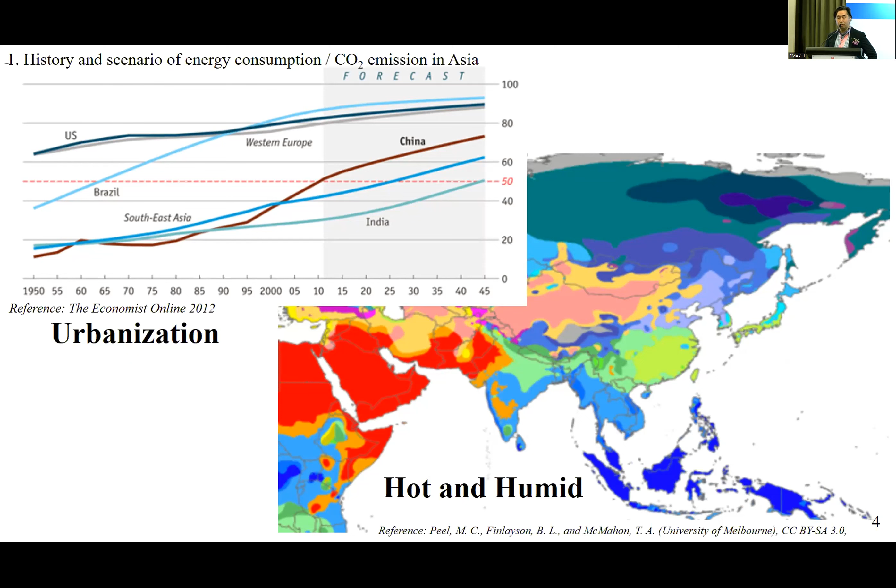Then from here, China and other developing countries are going to have more population in urban areas, becoming the same as us. It means people want to live in urban areas, right? This is one key point. And the next one is, you can see this climate zone graphic, and mostly the important cities - Tokyo, Singapore, Indian and Asian countries' fundamental cities - are located in the hot and humid area. So these are two keywords I wanted to emphasize today.

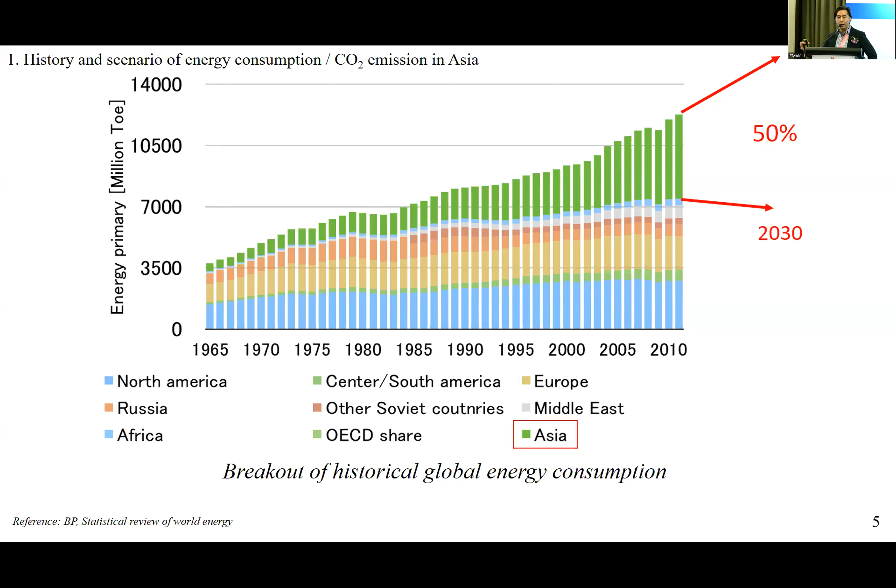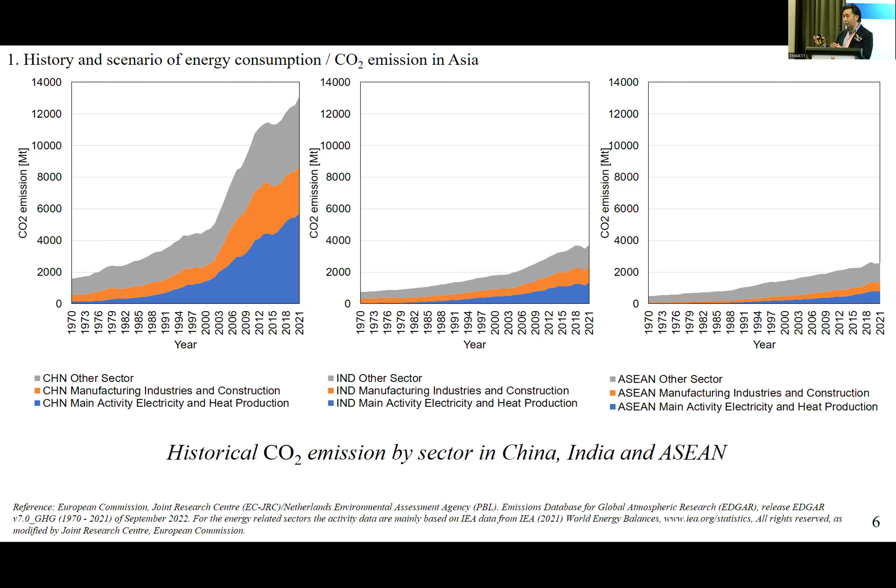Inside of Asia, of course, China is number one in emissions for CO2, followed by India and ASEAN. So the problem is people want to focus on the Chinese issue, but when it comes to some statistics in China, it's going to peak out as soon as possible, because the population is decreasing from now. And the Chinese target is by 2060 they are going to be carbon neutral. Maybe they will make a lot of effort.

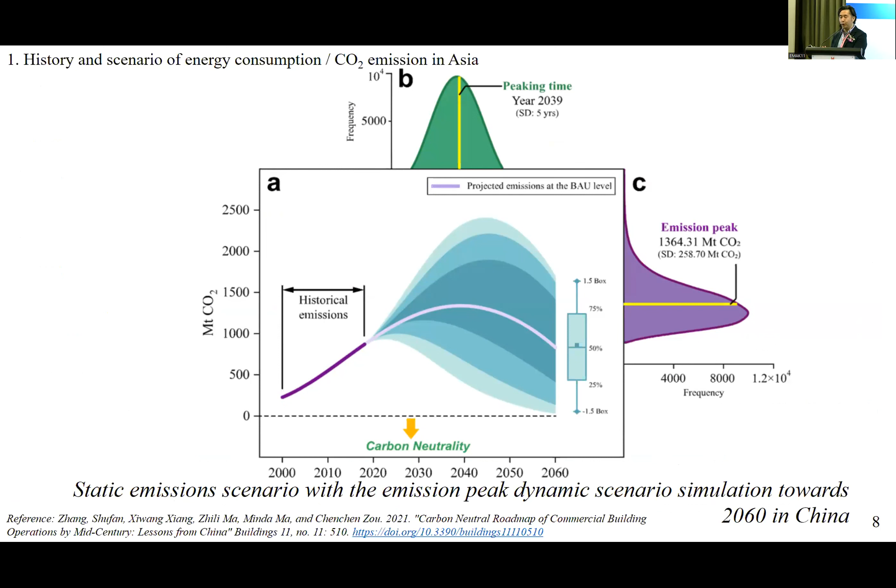So from now I will talk about some statistics in ASEAN. The ASEAN Center for Energy published some kind of scenario of future emissions - as you may know, BAU, ATS, APS, and LCO. These are different scenarios, and I will talk about them now.

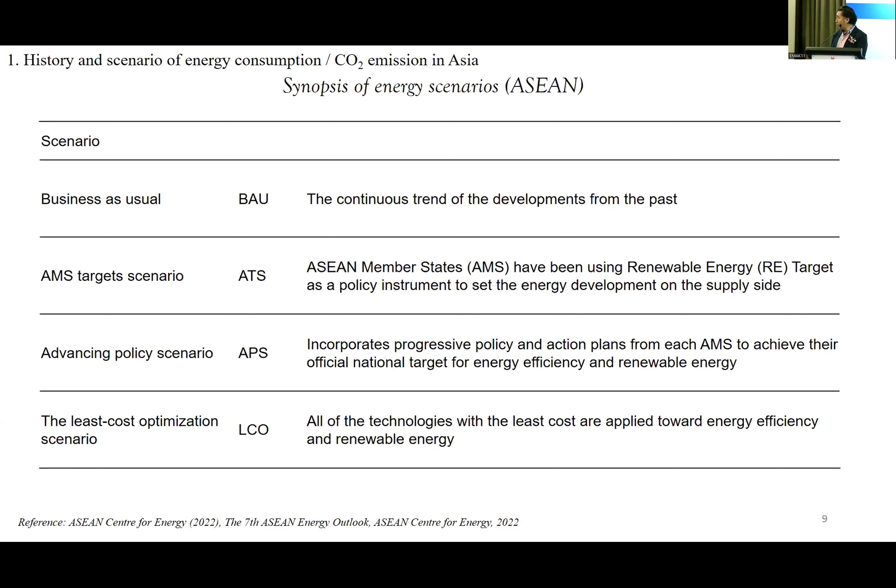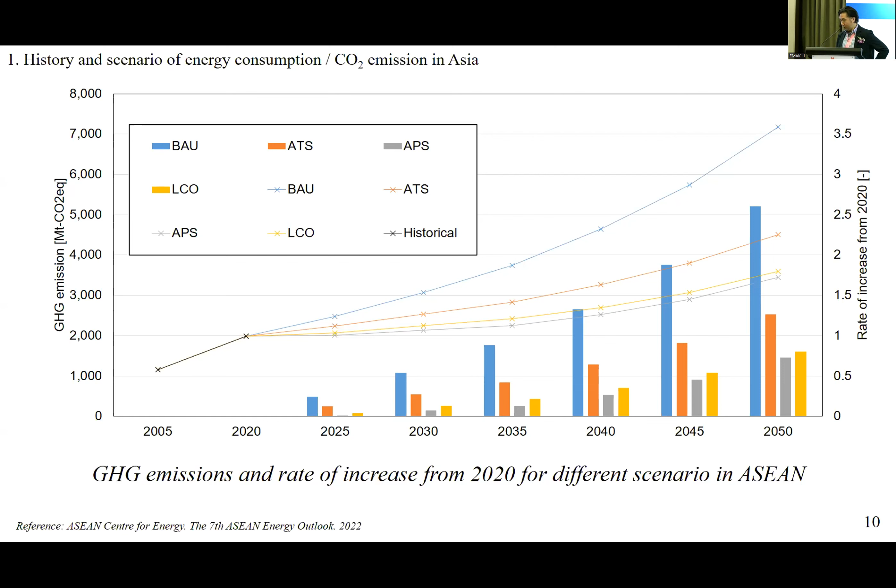But even if a lot of strategy was conducted, this area is going to be just increasing. It's totally far from carbon neutral - this is the real facts. As I mentioned, China is going to decrease even under business as usual. If this ASEAN area doesn't do anything, business as usual, maybe by 2050 or around that it's more than China in the future. Even if some kind of strategy was conducted, carbon neutrality is far, totally far. This is some statistics and the scenario mentioned.

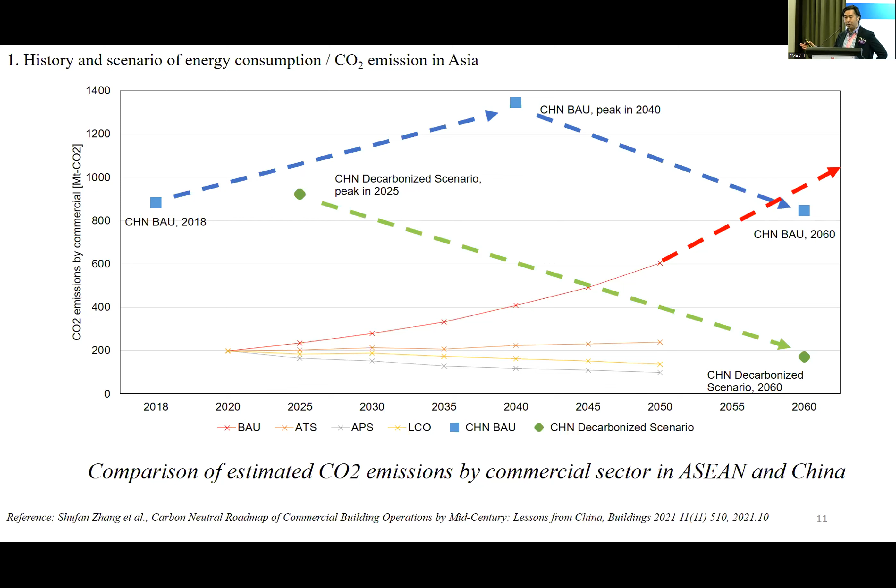So for carbon neutrality, the important thing is energy conservation first. The other important factor is emission efficiency. Yeah, this is very important.

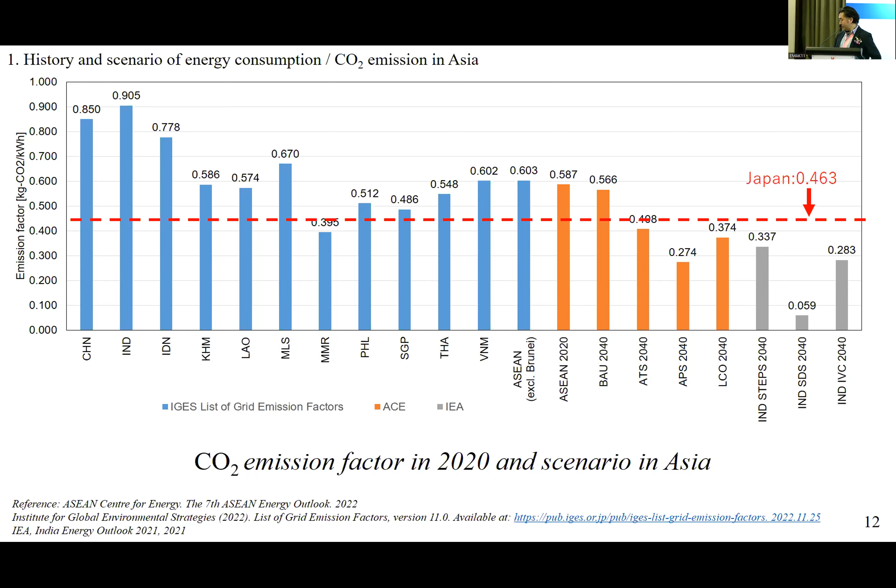So this is the ASEAN scenario of carbon emission efficiency from now. Business as usual is almost the same as now - there is no improvement. And the other most radical scenario showed 0.2, meaning almost everywhere is photovoltaic. Yeah, that's something difficult, I think. So maybe we have to discuss business as usual, and somewhere between 0.3 or around that is maybe more practical, I think.

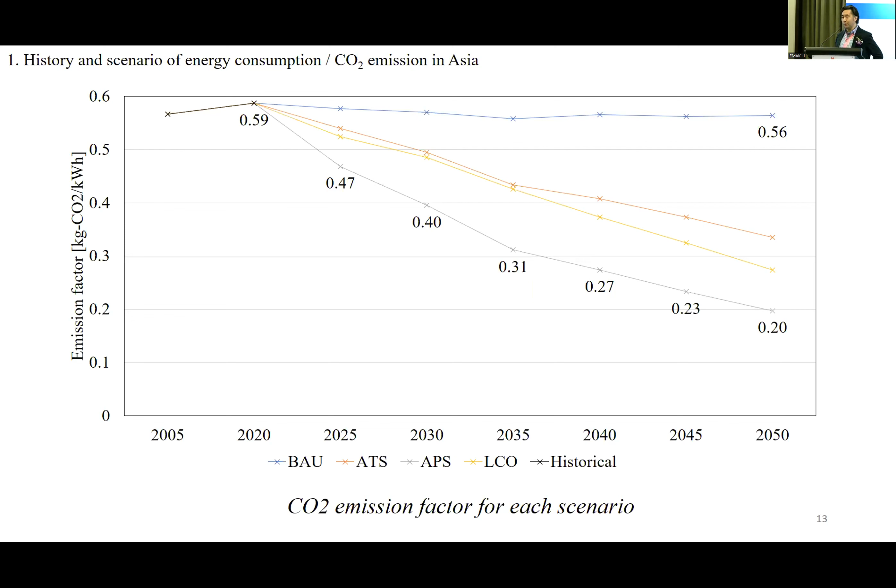So next I will talk about green building and zero energy building situation. This is an example of the green building project in Asia and ASEAN. You can see basically green building is super high-rise glass facade and fully air-conditioned.

In this area, green building certification is very keen to new projects, and people want to get platinum, gold, certified, anything. My research question is how this kind of green building project consumes energy, how much? Because there is less statistics and open data about this kind of buildings, this is a very big and important question for my research activity.

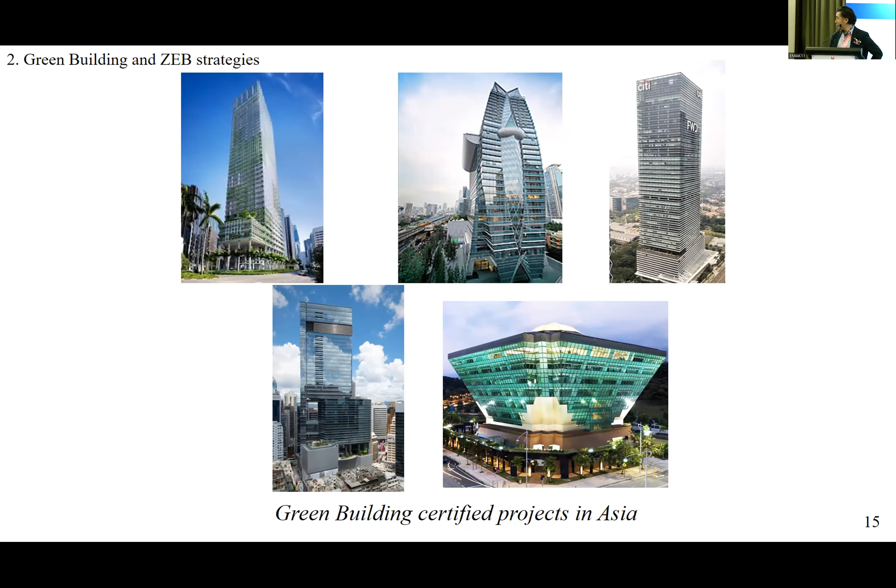This is a synopsis of green building and zero energy building strategy in Asia and Japan. In Japan, we have a clear definition for zero energy building. Other countries still don't have a definition of zero energy building, but ISO, Japan, ECCJ, and the community have already suggested ISO standards. Maybe some countries and areas are going to follow this standard.

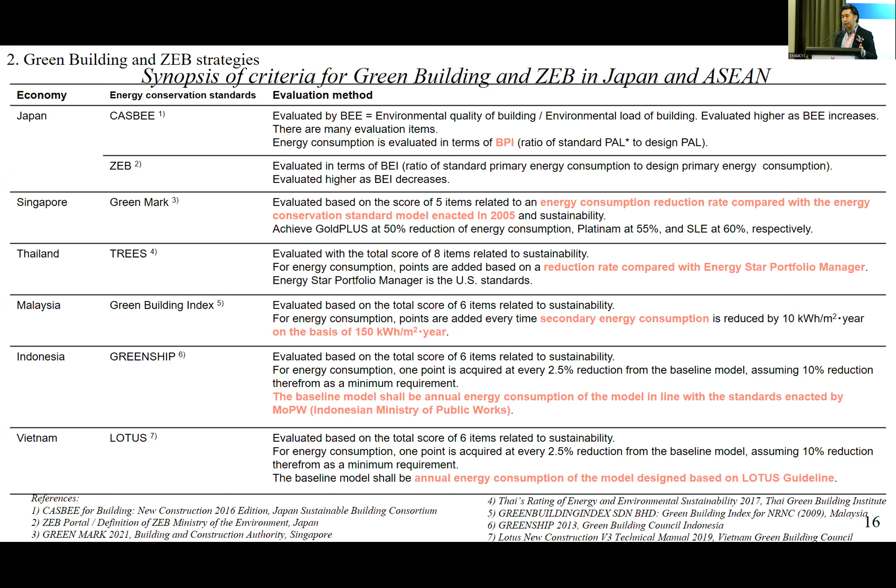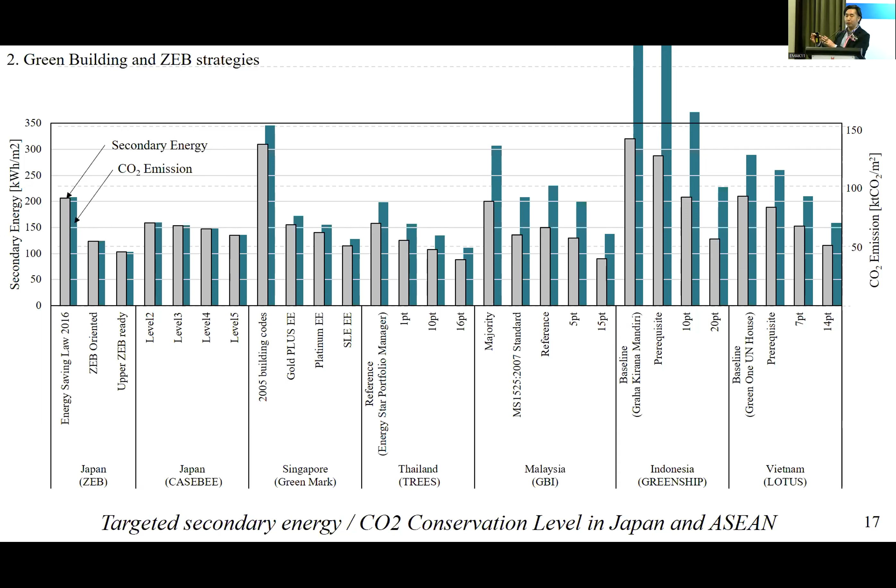There is a lot of definition for the green building standards and energy conservation law, so I compared the energy target level in each different country and area. In Japan, we have a definition for zero energy building. Normally we have a target for zero energy, and ZEB Ready is one of the practical target levels here. Comparing with ASEAN and Asian country standards, maybe Singapore's super low energy is almost the same level as ZEB Ready, and this can be shared with each other - how energy efficient the building is.

So when it comes to zero energy building, it's something different. This is an example of zero energy building in Japan, US, and China. As Dr. Clayton Mears presented, super high-rise is impossible for zero energy building. Normally 3 or 4 stories is maximum because it should be canceled out on the same site. I don't have to explain the zero energy building definition because maybe a later presenter will explain more detail.

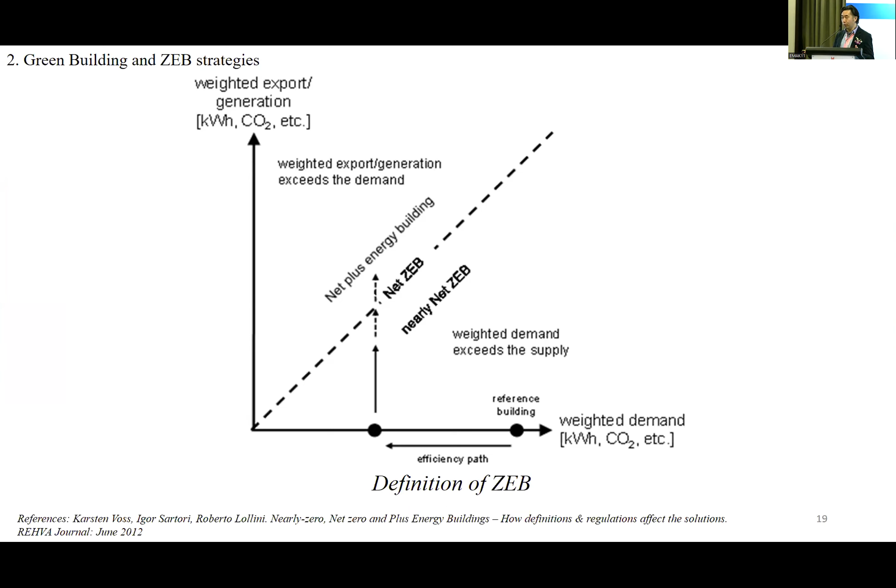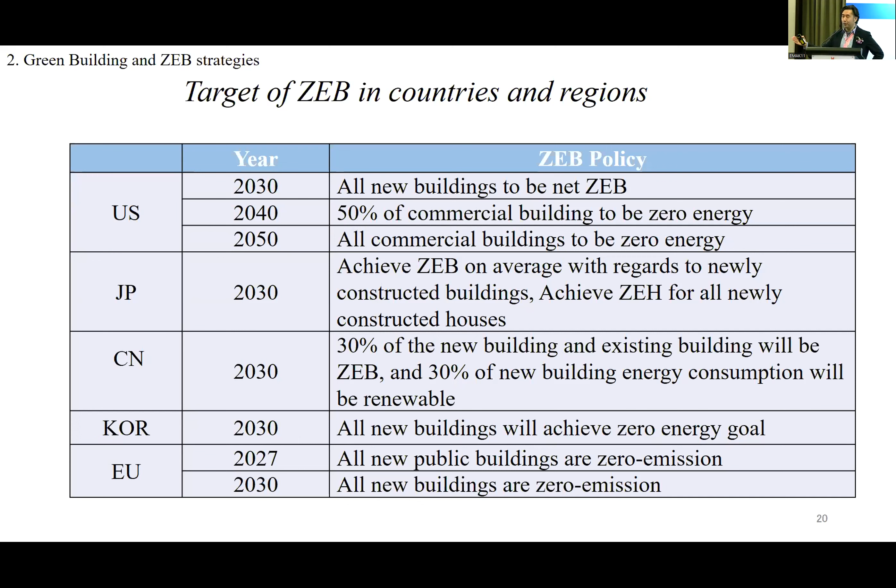Anyway, the important point is we have to reduce energy consumption first. Then we can move to energy production by photovoltaic or renewable energy. This is the target level of zero energy building - how each country has some target and goal for how zero energy building is spread. Normally 2030 is kind of a common deadline for how zero energy building is spread in each country.

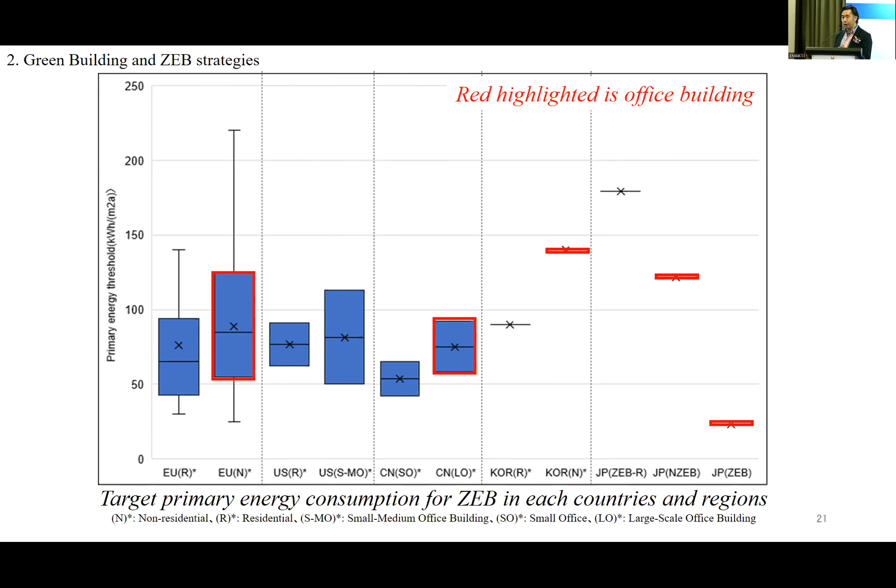Now I'm focusing on the statistics of zero energy building targets. Each country and area issues some target level of zero energy building energy consumption. I compared each different country, and simply said the target level is around 100 kilowatt hours per meter squared - that's a common level. But of course, the type of building and location affects this target level.

For example, in the US, I compared different states' zero energy building target level definitions. In hotter areas it's much more relaxed, and in cold areas it's also relaxed. So even if we say zero energy building, we have to consider climate and culture.

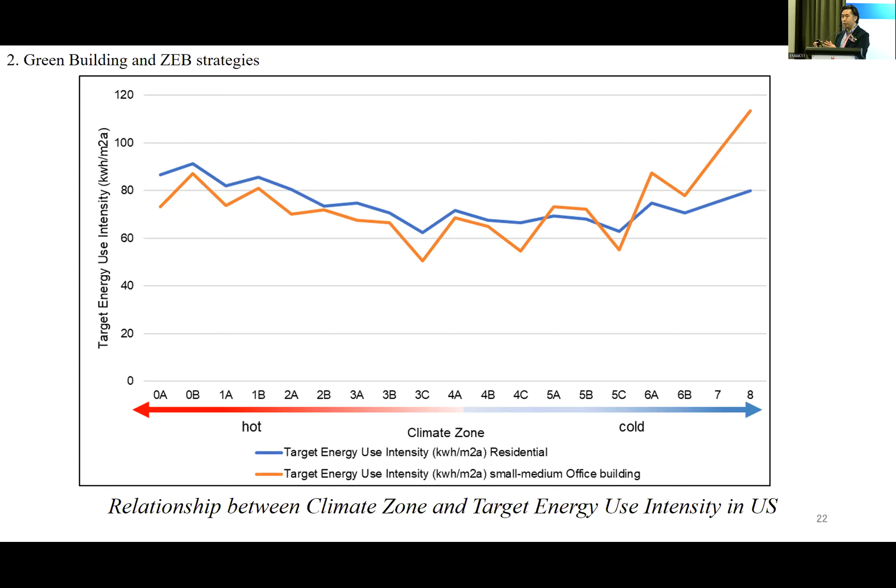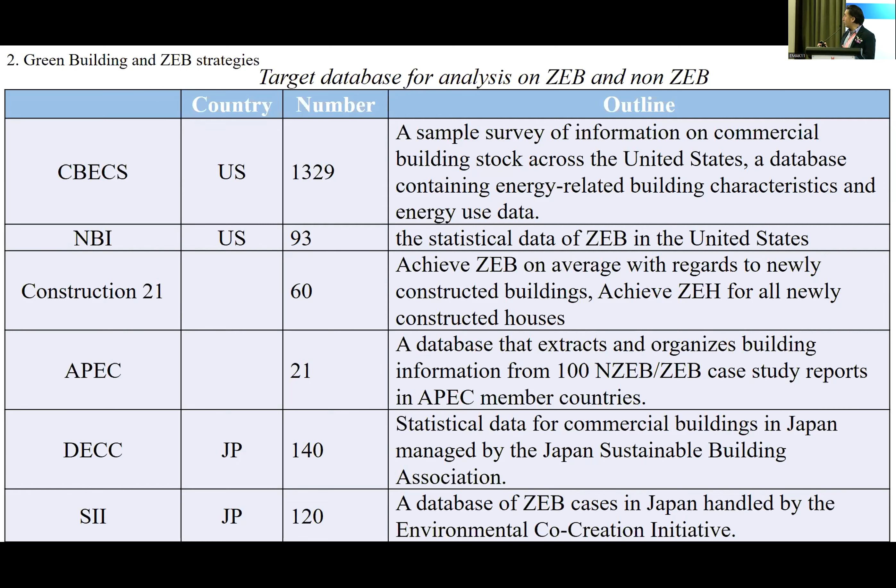In our research team, we surveyed a lot of databases all over the world, commercially available and publicly available. The first one is CBECS from the US - there we checked more than 1,000 projects. We also looked at NBI and Construction 21, the APEC database, DECC in Japan, and SII also in Japan. Actually, the database is still not enough for analysis, but we tried to collect a lot of databases from all over the world this time.

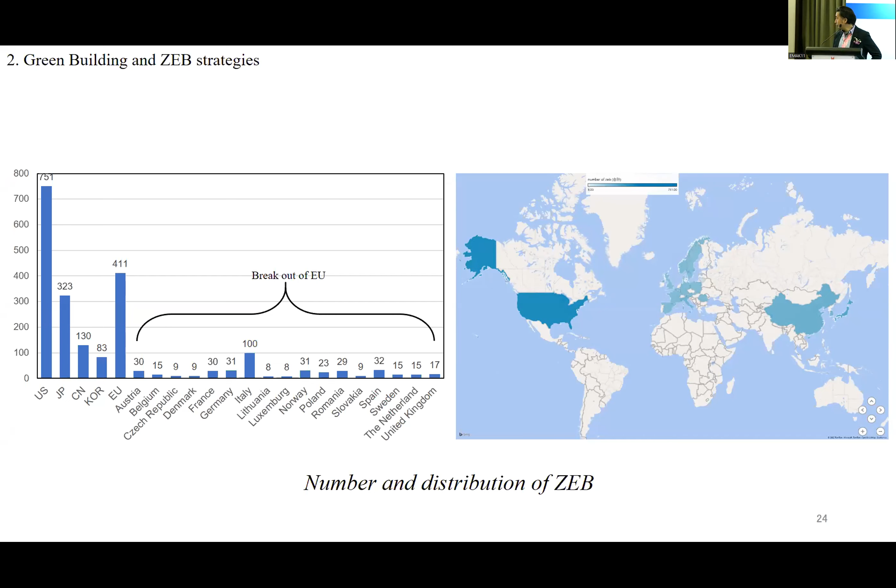So if we go to carbon neutrality, we cannot only focus on zero energy building. Non-zero energy buildings also have to be reduced to get to carbon neutrality. This is my opinion.

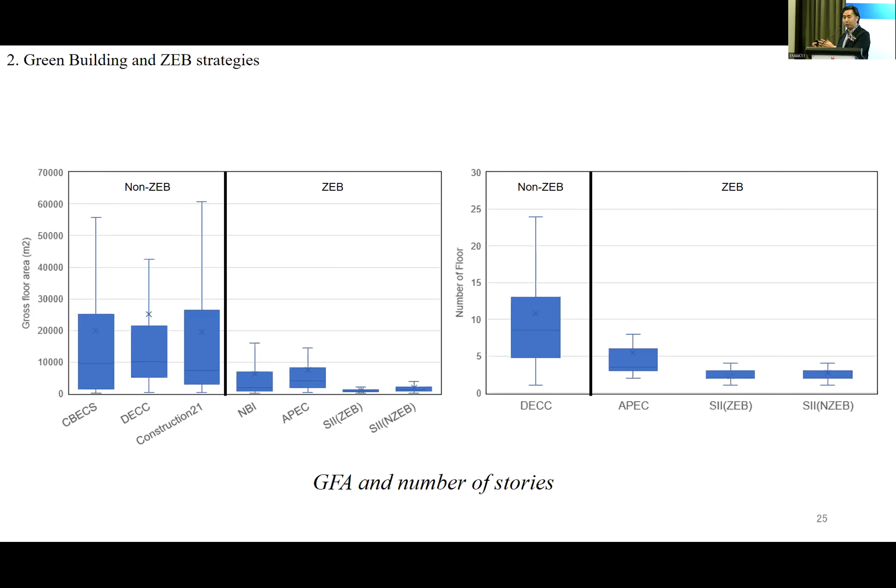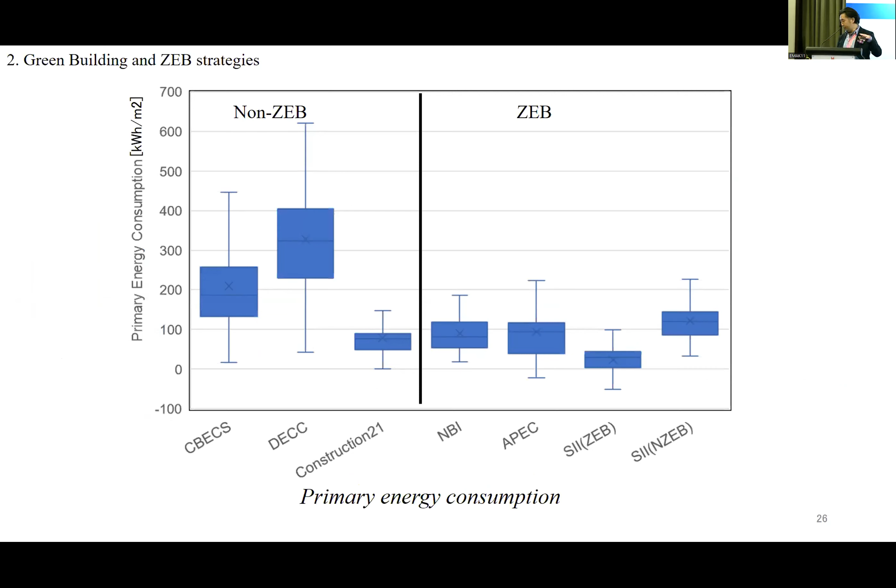Next, I will talk about our research project. As I mentioned, I have a strong research question about how the green building's actual energy performance is. Because of this question, I have been doing a lot of research surveys in these cities - almost I spent 8 years. Of course, our team is just 10 students and researchers, so it's difficult to conduct ourselves.

So I have a lot of collaborators in each target city with the university. In Singapore, I have collaboration with NUS and SIT.

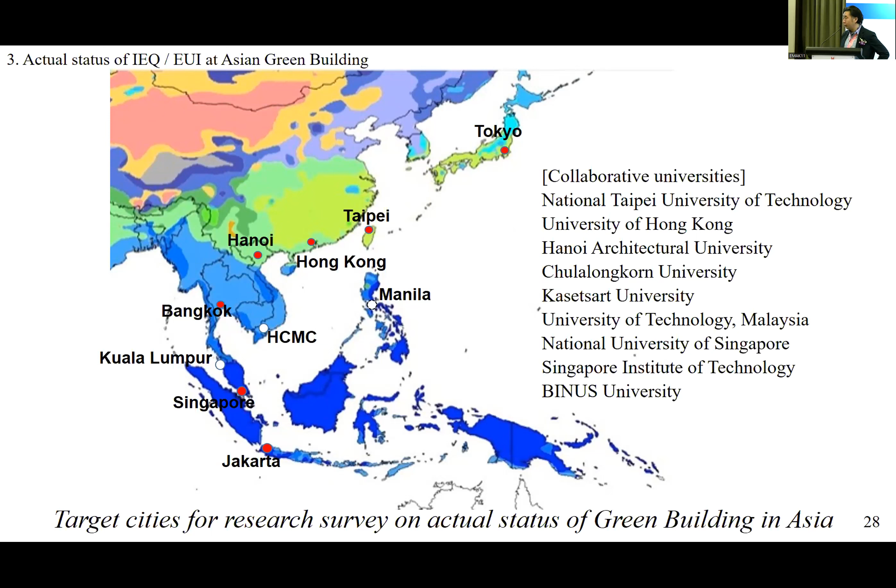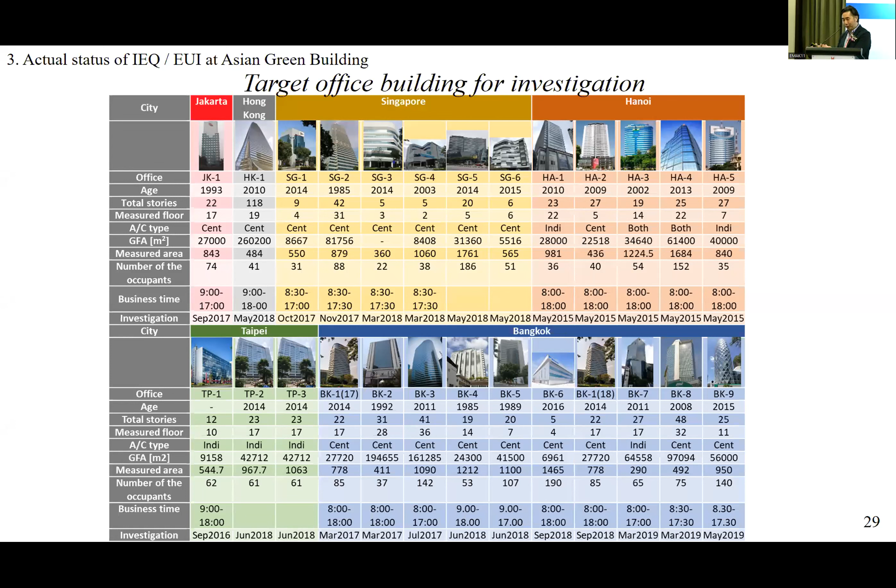This is an example of our target building in these cities. As you may know, it's quite difficult to get permission for this kind of research survey because the building is working and some building owners don't want real facts published. Mainly my work is negotiation, getting permission, explaining, and reporting.

Actually, because of data security and the promise with the building owner, I have to anonymize all of the building names. You can see the different cities here: Singapore, Bangkok, Hanoi, Taipei, Hong Kong, and Jakarta. This is a very clear result.

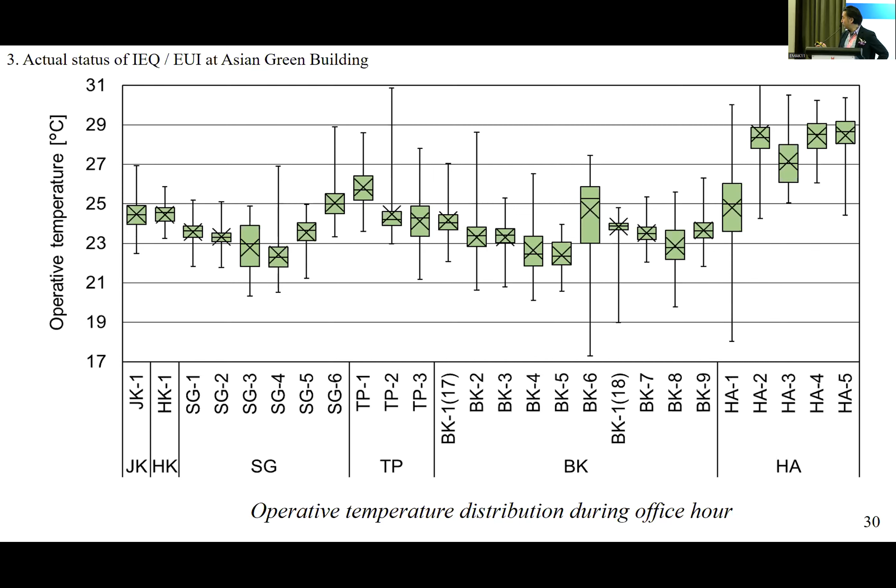Another fact is we also asked questionnaires in each office building, so people reported a lot of symptoms. It's kind of a syndrome of excessive cooling—people feel shoulder ache or a cooling feeling on the neck, shoulder, body. Almost 30%, more than 30% of people have sensation of this kind of sickness. This is a very serious issue, I think.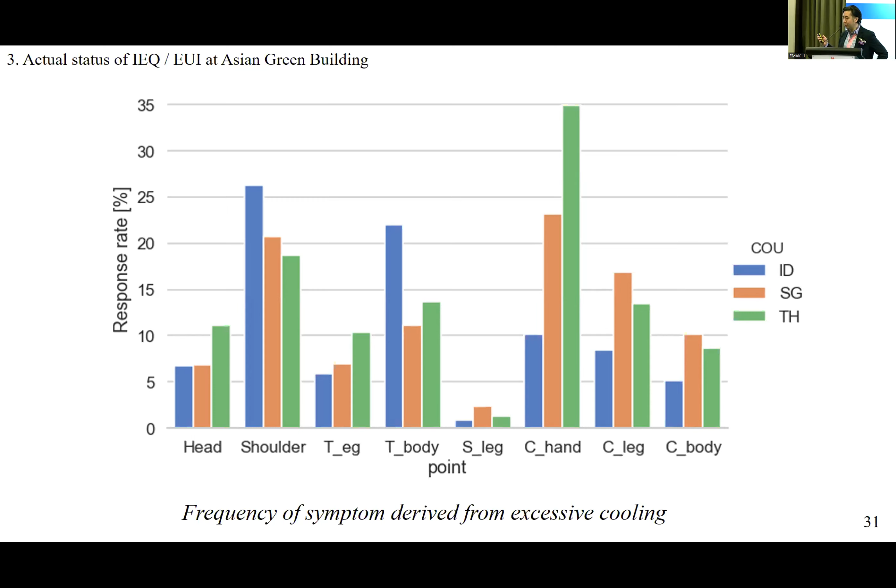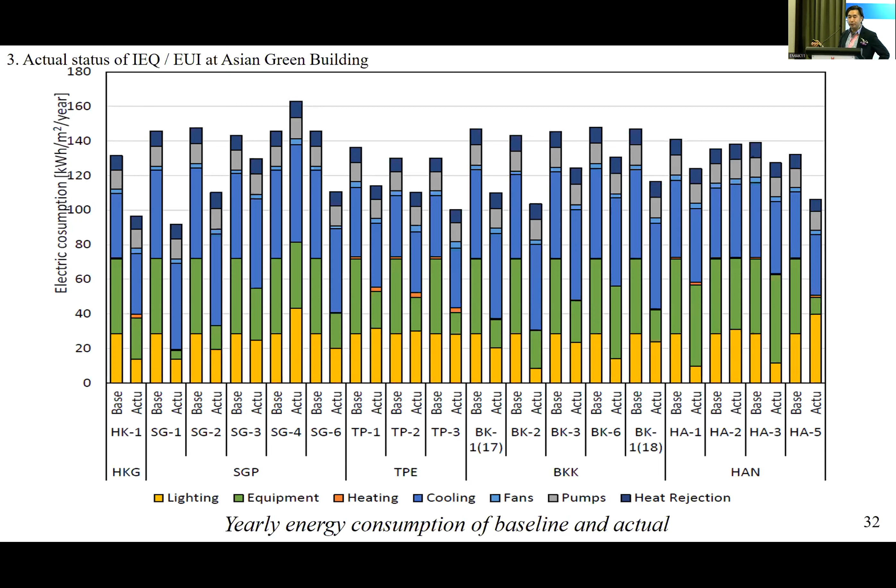Because of this kind of excessive cooling, energy consumption is also a problem, in fact. We just compare each project's baseline and actual energy consumption. Cooling energy consumption is too much. Some projects have LEED platinum level, but some projects show much more than baseline in real situation. This is a big problem, I think.

Because of this energy consumption, we compare baseline and actual energy consumption in this graph. You can see different colored plots: non-certified, gold level, platinum level. But simply, you can understand there is no relationship. Some non-certified projects also show good performance, but some platinum projects don't make sense. So this result shows current green building certification doesn't make sense so much about real energy conservation.

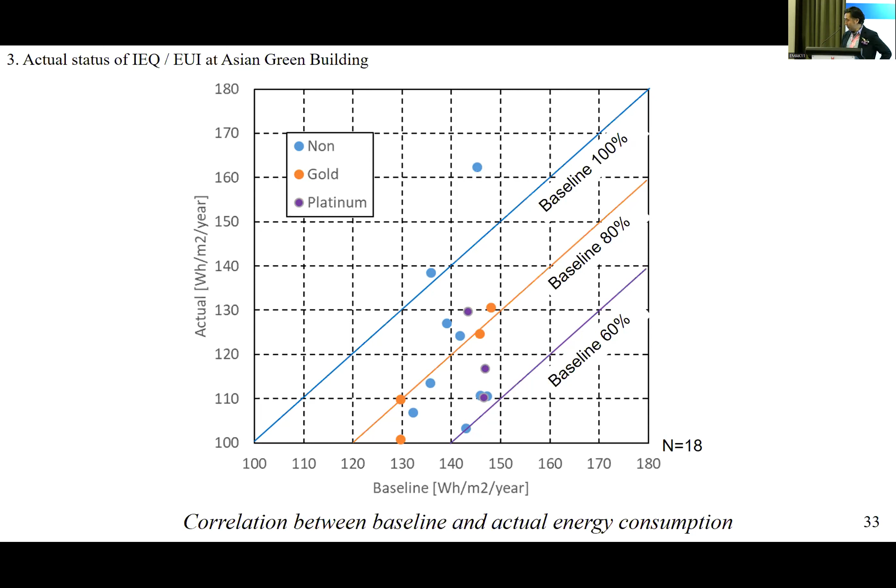So this is a simple result of our research project in this area. Next, I will talk about how zero energy building technology contributes to reduction of emission. Because our research survey is limited, just a one week survey, and some buildings gave us holistic energy consumption but some buildings don't share with us, from now I will base this on the energy simulation result.

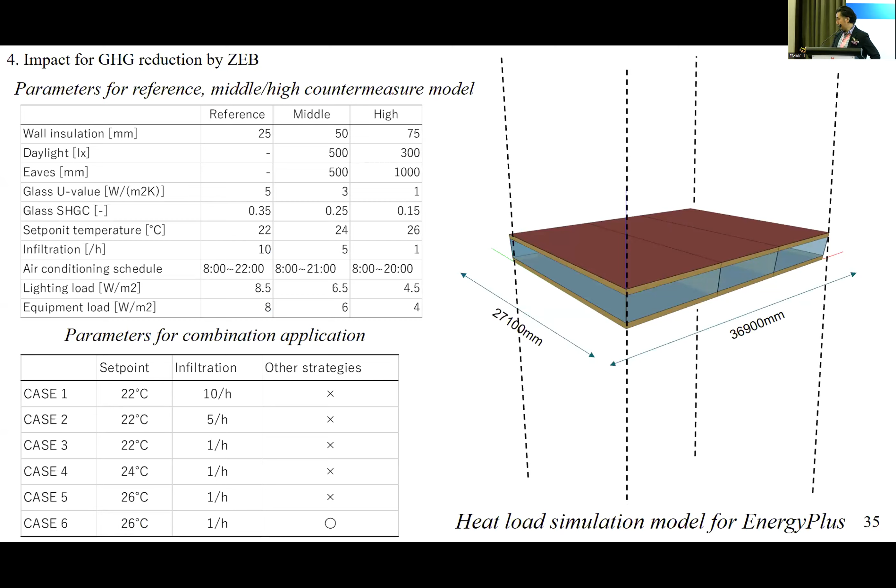Anyway, a lot of zero energy building technology options exist, for example efficient facade, efficient air conditioning system, or something like that—a lot of options. But simply said, the most efficient technology is ventilation and air tightness of the building, because most of these cities are in the tropics, hot and humid.

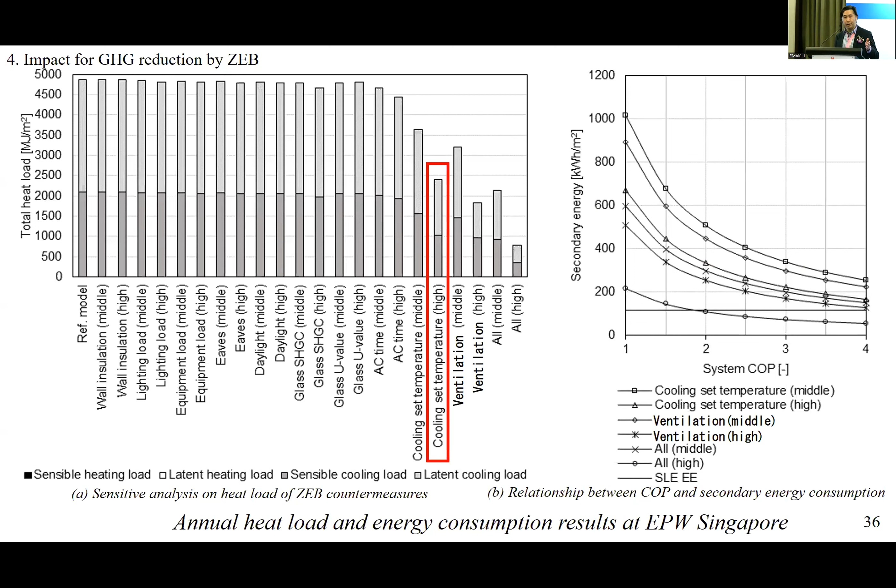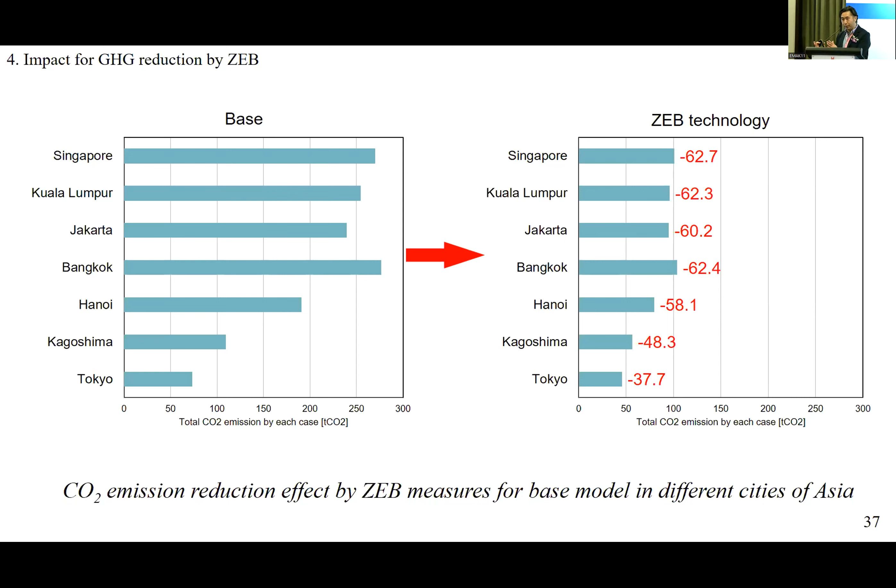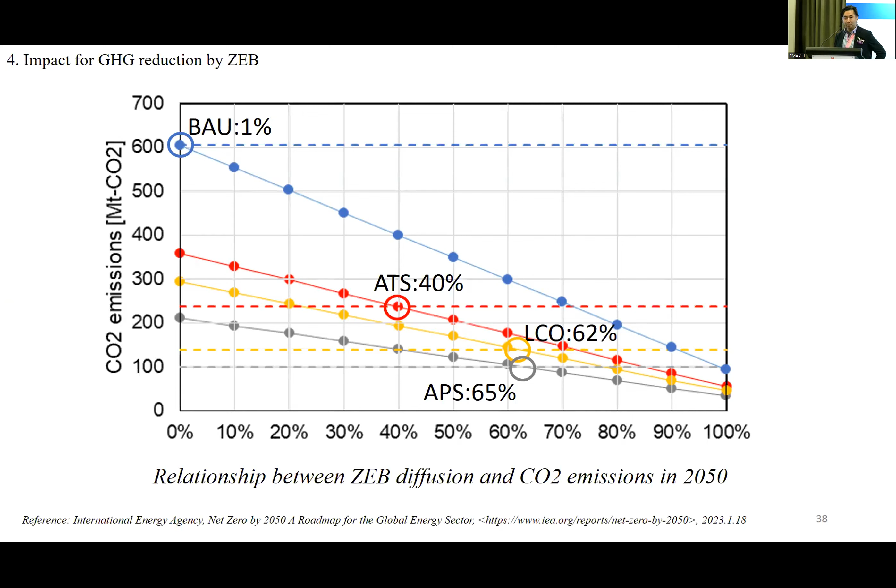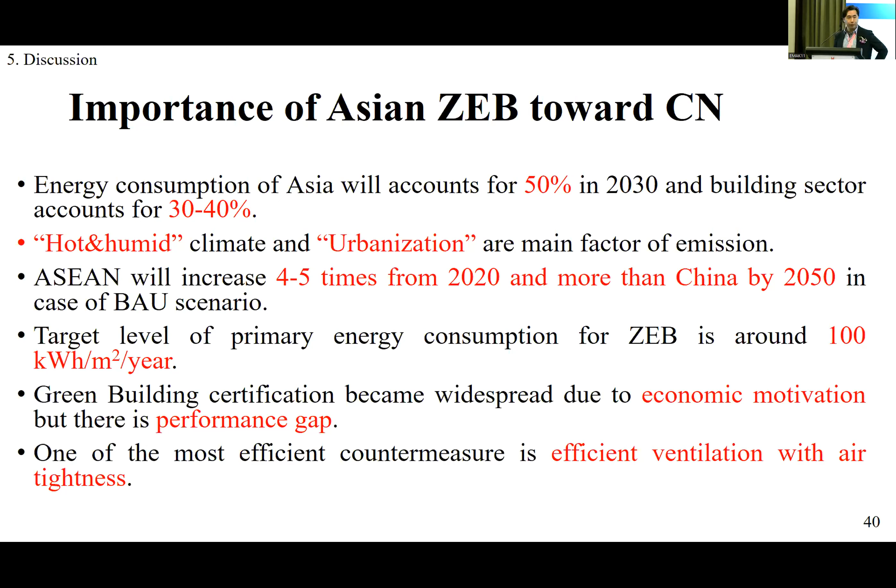So I would like to finalize my presentation here. This building area is very responsible for sustainability worldwide, because our energy consumption accounts for almost 30 to 40% right now, and zero energy building technology should be spread to 40 to 60% by 2050. This is a very big challenge for us.

I also wanted to mention data transparency and sharing, because my research involves accessing real energy consumption and indoor environment data, but it's very difficult because there is no framework for sharing data—this kind of issue. Because of COVID, and now we have to pursue sustainability, we need to share data with transparency. This is what I wanted to emphasize this time. Thank you very much for your kind attention.